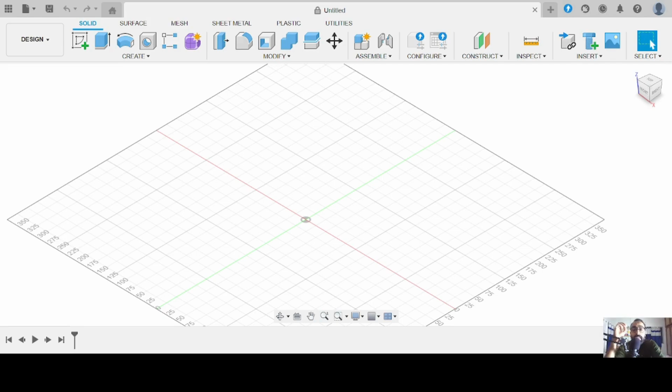In today's session we will cover how to input an SVG into Fusion 360 and create a 3D printable object from that. For reference, we will create a small keychain with an Instagram logo on it. I have a downloaded SVG file of the Instagram logo, available on Google, and we'll use that. We'll start by creating a component, and name it keychain sample.

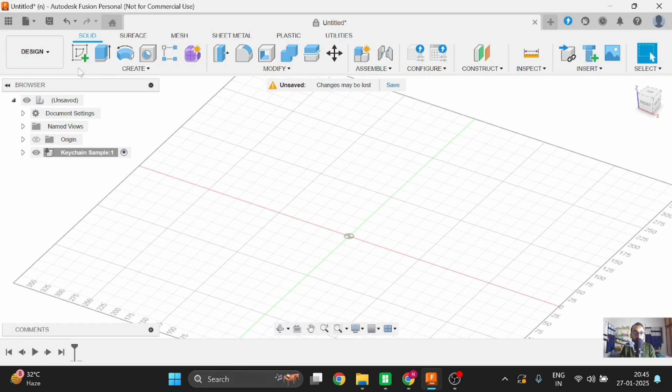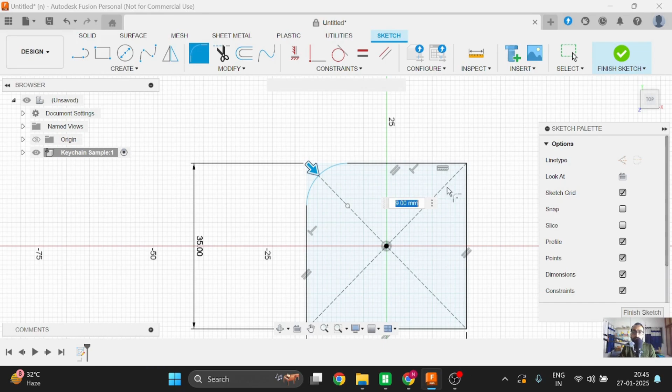Once that's done, we'll start creating a sketch for this component. Click on R, and on the plane click on the rectangle, the center rectangle. We'll create a square of 35mm by 35mm, an ideal size for a keychain which is quite user friendly. To make it more user friendly, we'll give it a fillet on the corner so it doesn't have sharp edges.

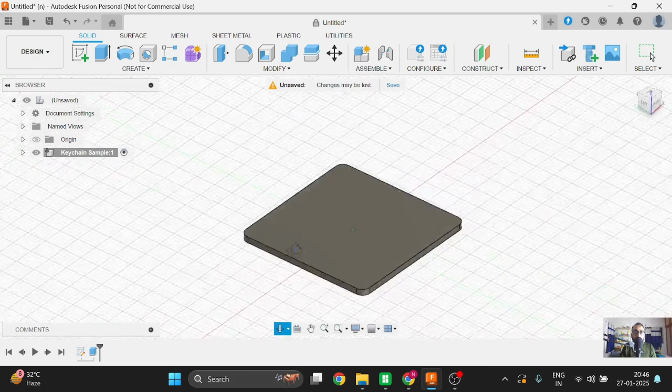We'll give it a fillet of 2mm, and once done, click on the square we've created and extrude it up to 1.5mm, which is more than sufficient. So we have a plane surface which can be used as a canvas for creating the Instagram logo on top of it.

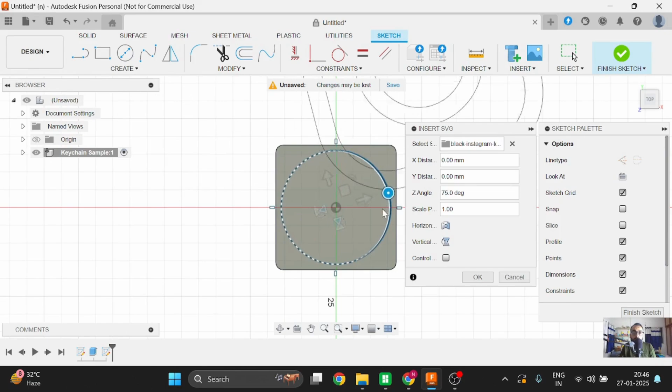We'll click on the top plane and click on insert SVG. Since it's downloaded into my computer, I'll use the option of insert from my computer. As you can see, I have the downloaded image over here. I'm just going to click on this, and the SVG is imported, but the size is a little big than what we want.

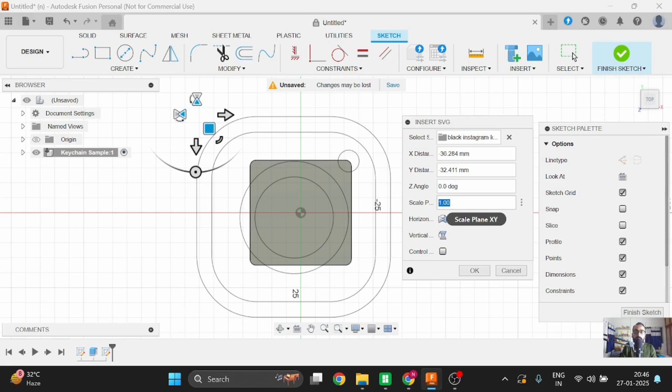So we are going to scale it down to 50%. This is a scale function available in Fusion, where you can scale down the SVG to whatever size you want. I'm scaling it to half, 0.5 of the original size, and let's see if that fits in. Yeah, it seems like it fits into the size we've created.

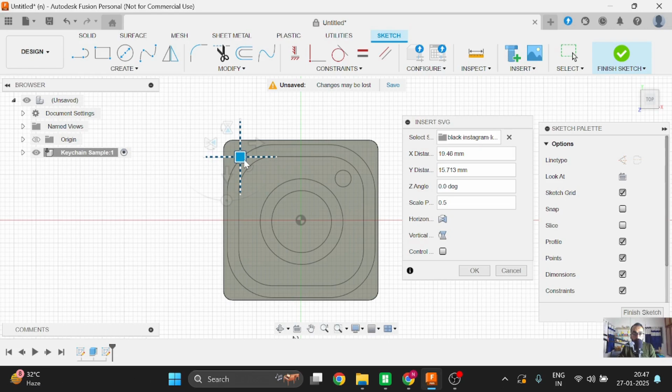You can just manually center it a little bit, should be visually appealing, and once that's done, click OK. As you can see, we have the lines of the SVG embedded onto our plane surface of the previous square we created.

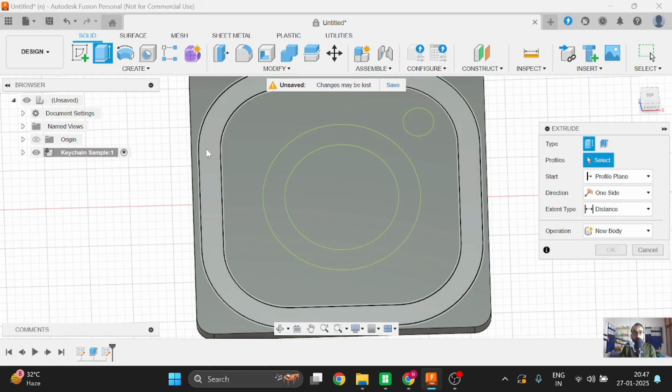Now we can go ahead and select those, click finish sketch, then click on the extrude option. Select the lines or features we want to extrude for the Instagram logo to pop out on the keychain, and give it a thickness of 1.5mm, which is more than sufficient so it will look decent without being extra thick. Once done, click OK, and as you can see, we have an Instagram logo on a canvas.

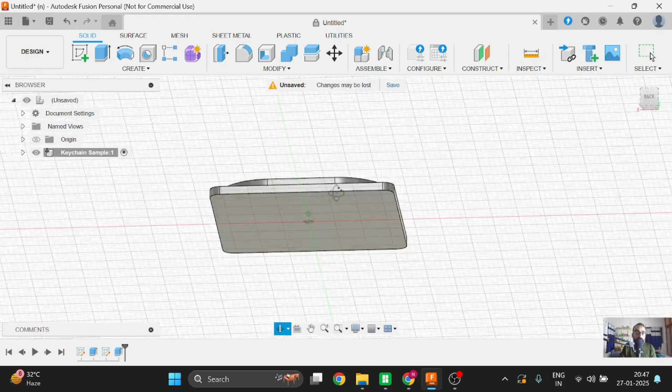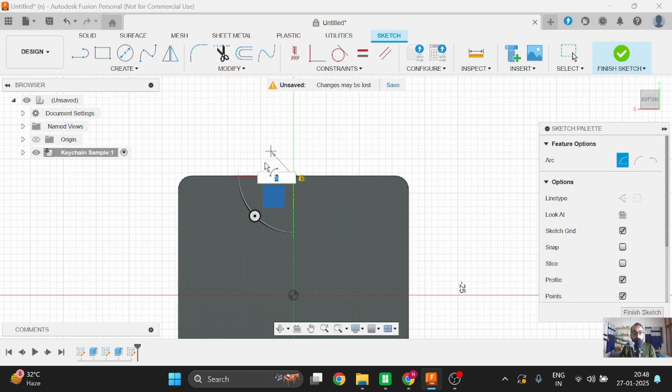The last thing that needs to be created is the keyring hole where the keyring will go. Click on the plane below and click on create sketch. Once done, click on the arc function, check for center point arc, take the center, and a 5mm hole is more than sufficient for a keyring. Select the starting point, the ending point, and the arc is created.

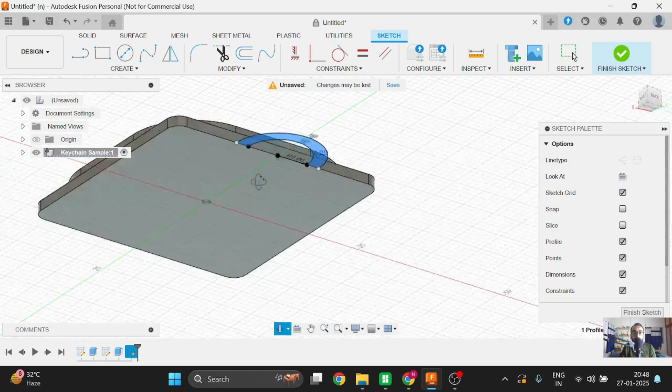Click on the arc and offset it using the offset function, for 2mm, which is more than sufficient. Click OK, and it has created a sketch. Select the sketch, finish sketch, and extrude again up to 2mm, so it gives sufficient thickness to put the ring through this loop and complete the keychain.

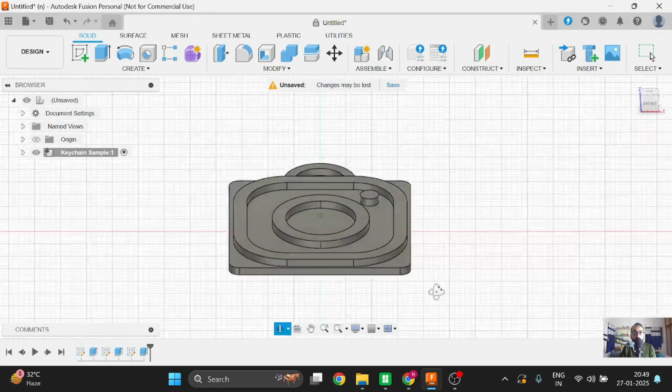As you can see, we have the keychain ready over here. Within 3 minutes we have created a quick keychain from an SVG image, and this model can be exported using the function over here.

When you right click on the body, it gives you an option of save as mesh. Click on save as mesh. You don't need to change any output parameters; whatever is preset is more than sufficient for a decent print, so keep the settings as is and click OK.

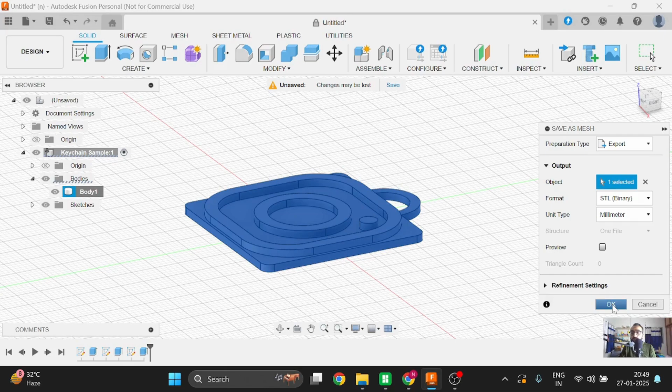It will ask where you'd like to save your file, so I'll rename it to keychain sample and store it into downloads. So my STL file has been exported from Fusion 360.